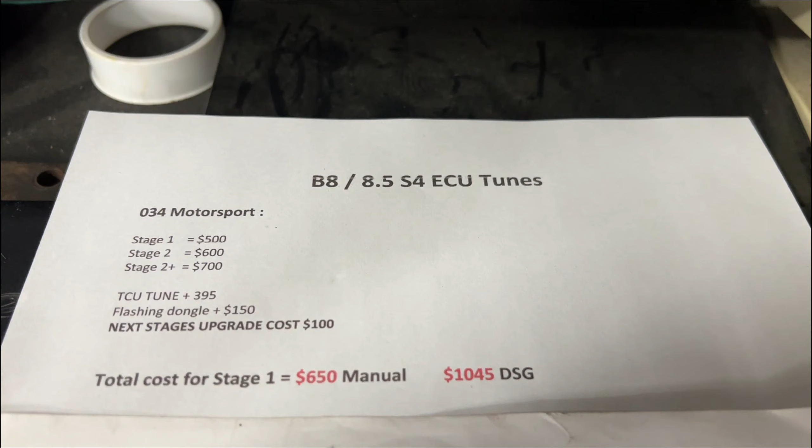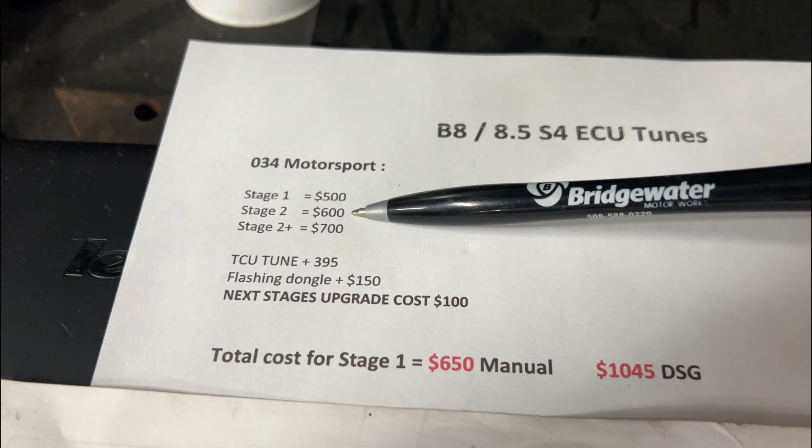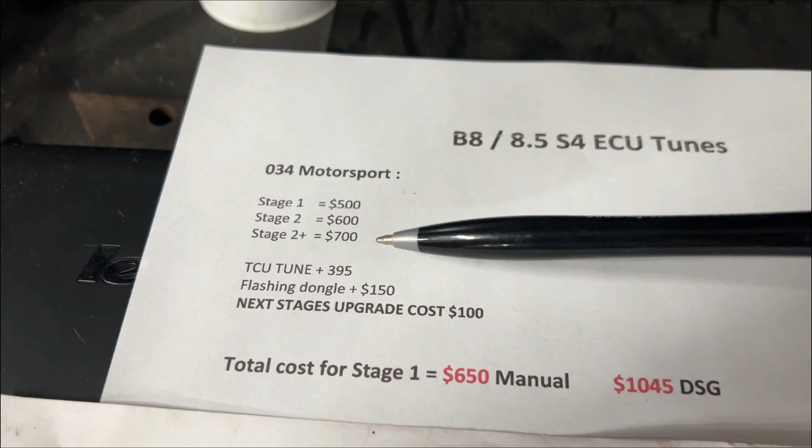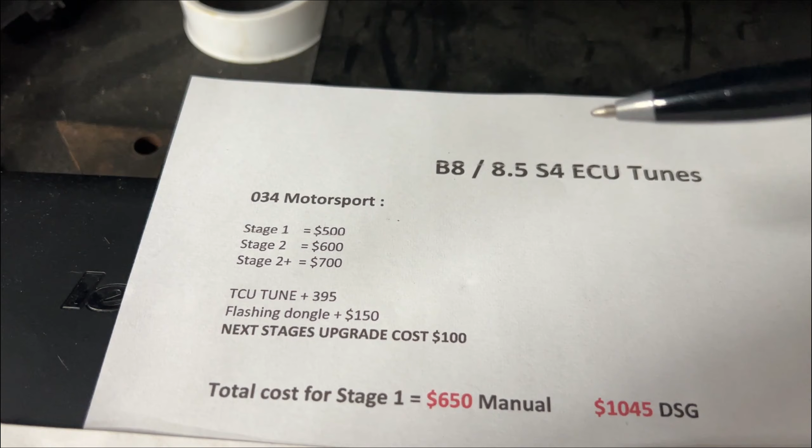The first one on the list is 034 Motorsport. If you wanted to do stage 1, it's 500. Stage 2 is 600. Stage 2 plus is 700. Keep in mind this is for a manual. If you wanted a TCU tune or a DSG tune, as they call it, you add $395 to that, and you also need to add $150 for the flashing dongle or the Bluetooth adapter for your phone. We'll talk about that a little later.

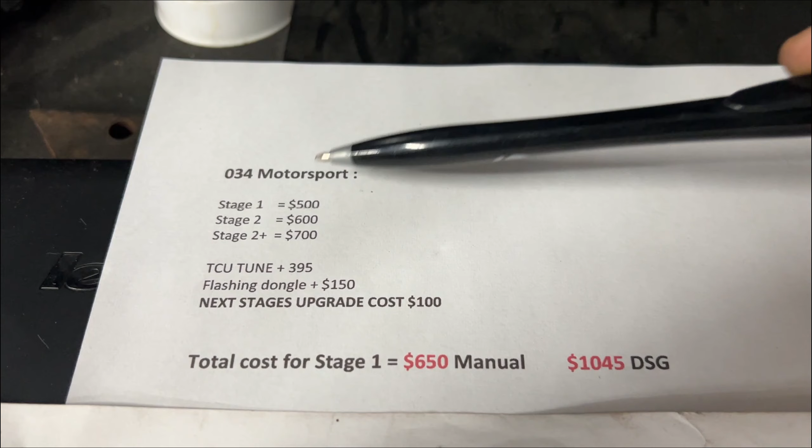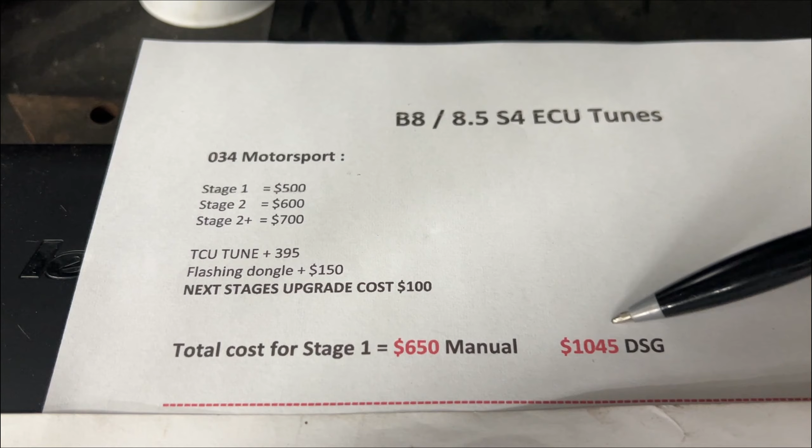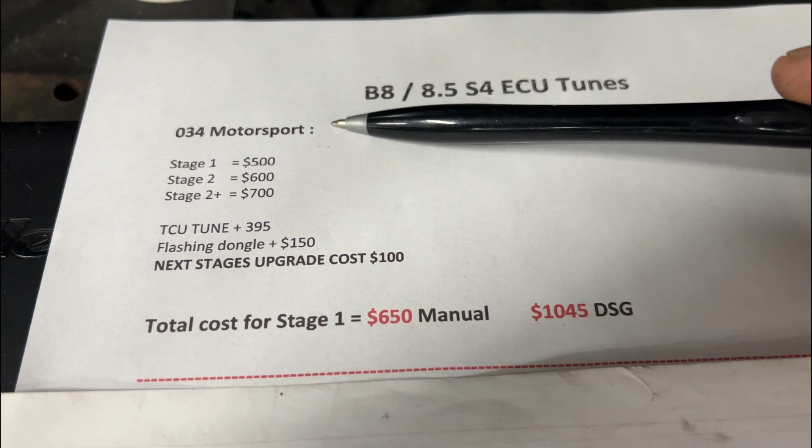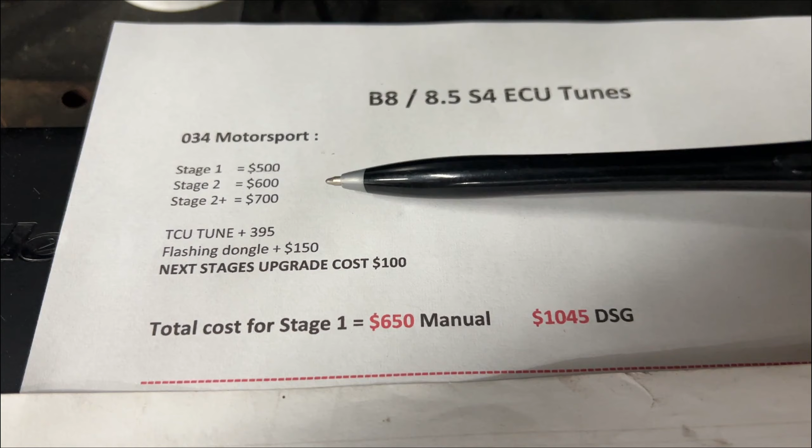Either way, if you have a manual S4 and want to tune it stage 1, all you'd pay is $650, so the 500 plus the 150. If you have a DSG, you'll pay the 500, the 395, and the 150. So that's how much it costs for a stage 1 tune with the DSG tune—not too bad. Again, they're a good company with good launch control modes and stuff, but for stage 1 there's really nothing aggressive because the car is just stock anyway. It has a cat, so you can't really do the crazy launch controls they have with a cat in place because you'll destroy your cat.

The next one on the list is GIAC. For their manual cars, all their tunes are 500, and for their DSG cars, all their tunes are 650. So why are they all the same price? Well, with GIAC, everything is a bundle. Like me, I have a manual B8.5 S4, so I bought the stage 1. I don't need a TCU tune, but I had to buy the flashing dongle, which is just an OBD2 plug with a cable that goes to your laptop.

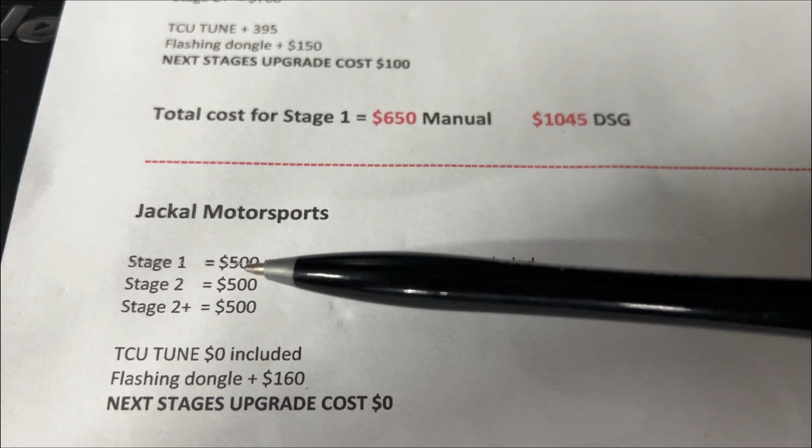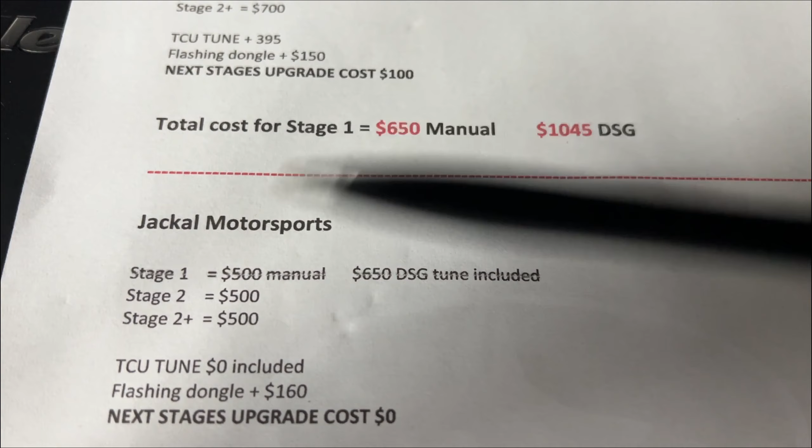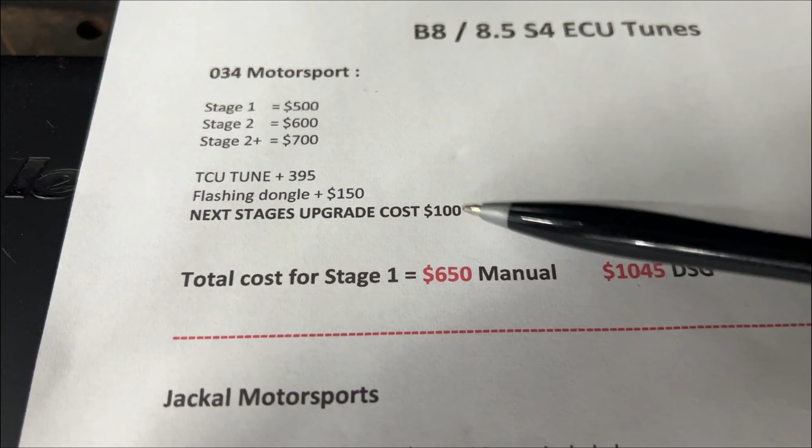The cool thing about this company is if you buy stage 1, upgrading to stage 2 or 2 plus is all included. So once I buy one, all their tunes are included in a package—I can change them back and forth anytime I want for no extra money. Whereas with 034 Motorsport, if you got stage 1 and then wanted to go to stage 2, you have to pay $100, and if you put the mods in your car to go to stage 2 plus and flash it again, that's another $100. So that would be up to $850 by the time you get to stage 2 plus.

So it's cool that the TCU tune is included if you buy the 650 package, obviously, since it's a DSG. To tune this car with stage 1, which is what I did, it'll be 660—the 500 plus the 160. Or if you have a DSG, you'll pay the 650 plus the dongle. You really can't beat this price, especially since it includes all their tunes, while all the other companies want to upcharge you to go to the next stage. But let's keep going on the list.

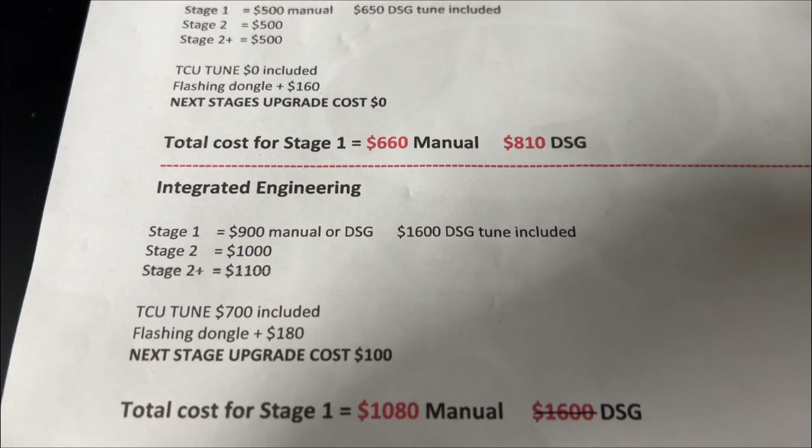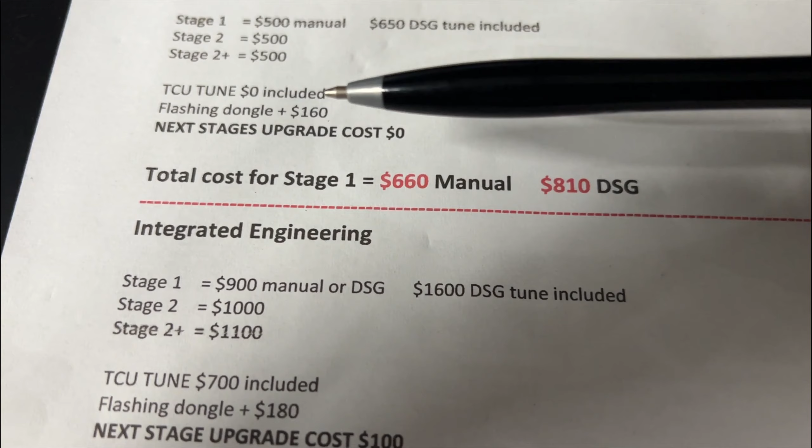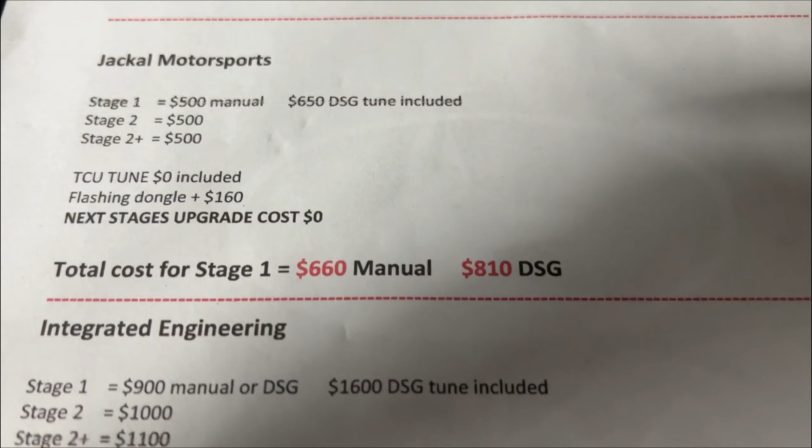So this is the last one—Integrated Engineering, a really good company. They make awesome stuff, I just think their pricing is a little off, especially having competitors. They seem to not understand they have to be more competitive if they want people to stay with them, because a lot of people are switching out. But let's go through the numbers and check it out: their stage 1 is a whopping $900.

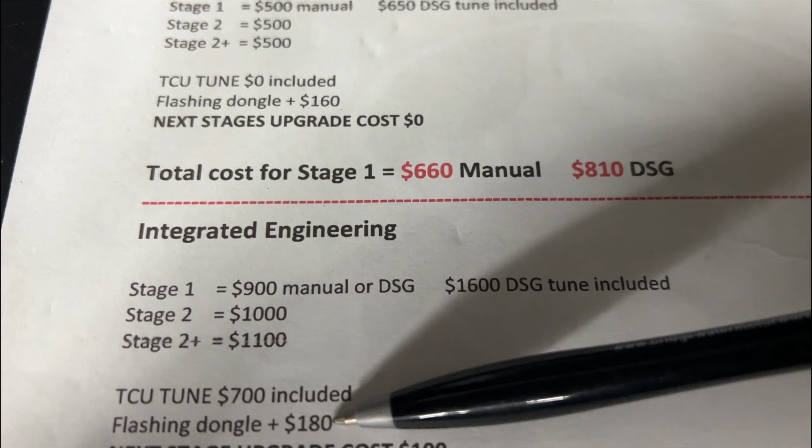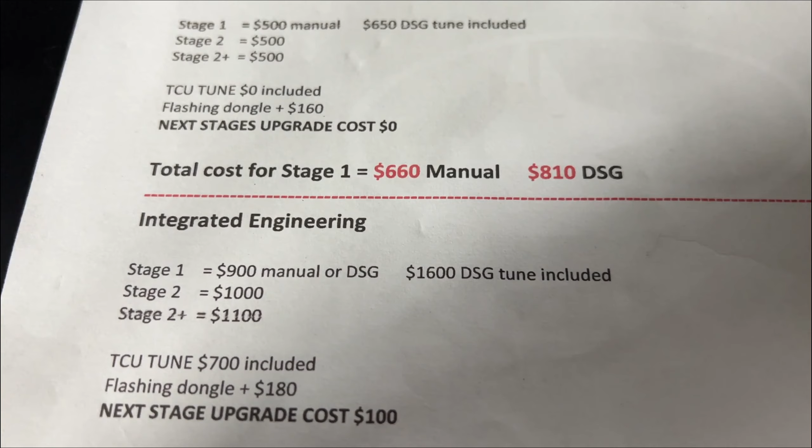Their stage 2 is $1,000. Stage 2 plus is $1,100. This is just for the tune, whether you have a manual or a DSG, that's just for the engine tuning. If you want to get the TCU tuned, that's an extra $700. And their flashing cable costs $180, which is also done on your phone. And you also have to pay $100 to upgrade to the next stages. So if you have stage 1, pay $100 to go to stage 2, pay $100 to go to stage 2 plus.

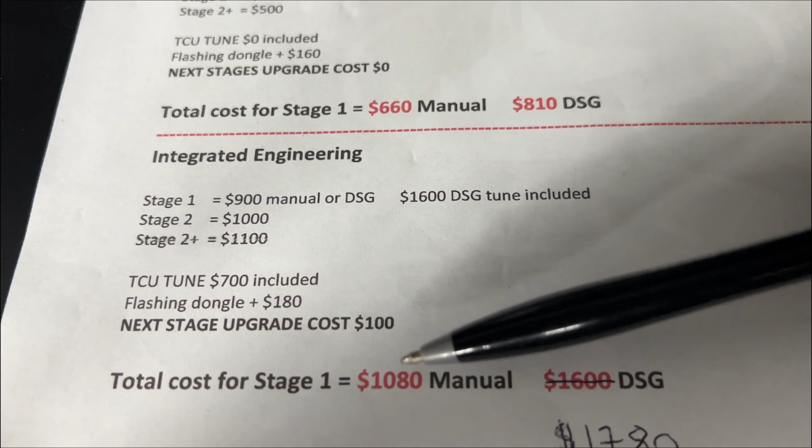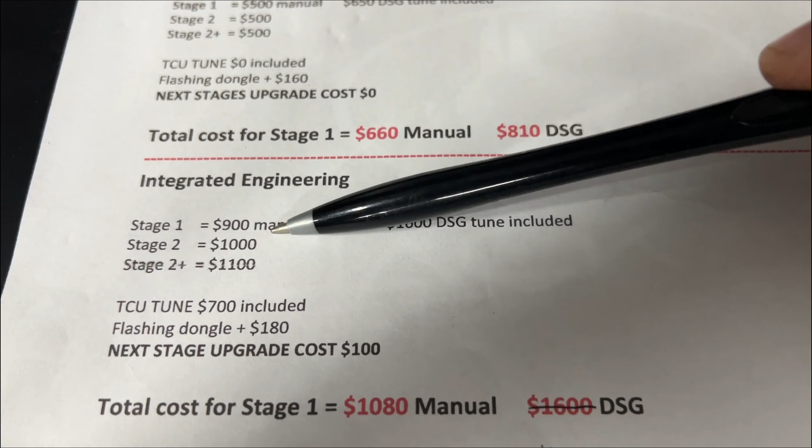So the total cost to do a stage 1 tune on an S4 would be $1080 if you have a manual. So you pay the $900 plus the $180. If you have a DSG, you got to pay the $900, the $700, and the $180, total $1780. And it's insane that they're asking $1780 to do a stage 1 tune and a TCU tune to your car when other companies are clearly way cheaper.

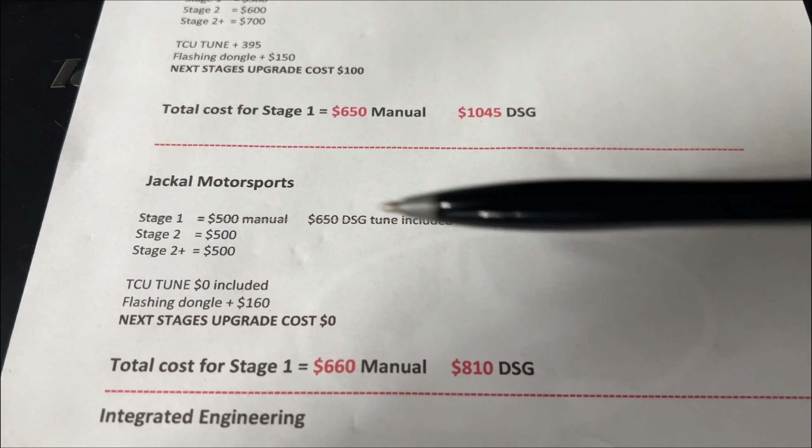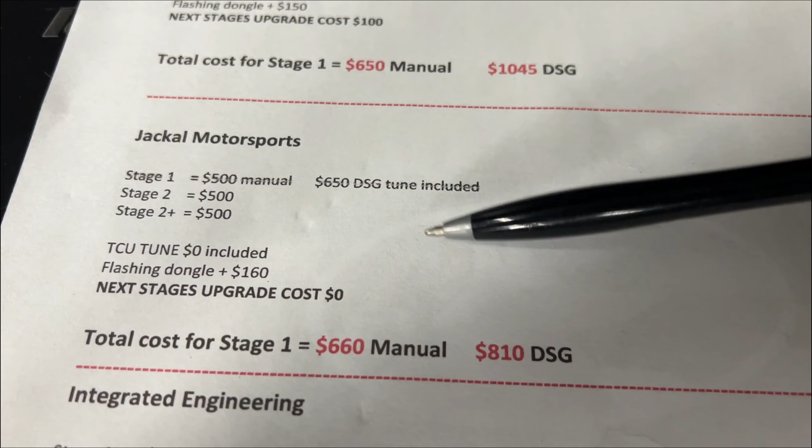And not only that, there's been a lot of claims and people that go to the track and they're racing against people with these companies, and this tune is actually beating them speed wise. So why is this tune so much cheaper and it's actually a better tune?

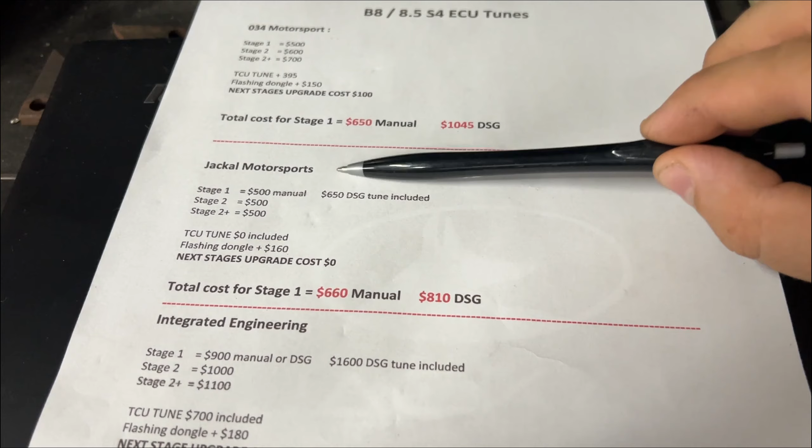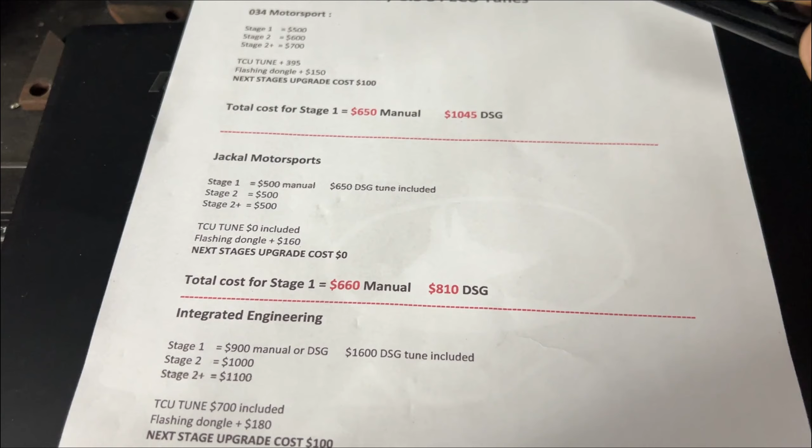Now, yeah, these two companies do have some features on the app and stuff, and that's another thing. For Jackal, you do need a laptop with internet to basically download the tune file and flash your car. With these two here, when you pay for the dongle, you get something that is Bluetooth to your phone, and you can flash it from your phone.

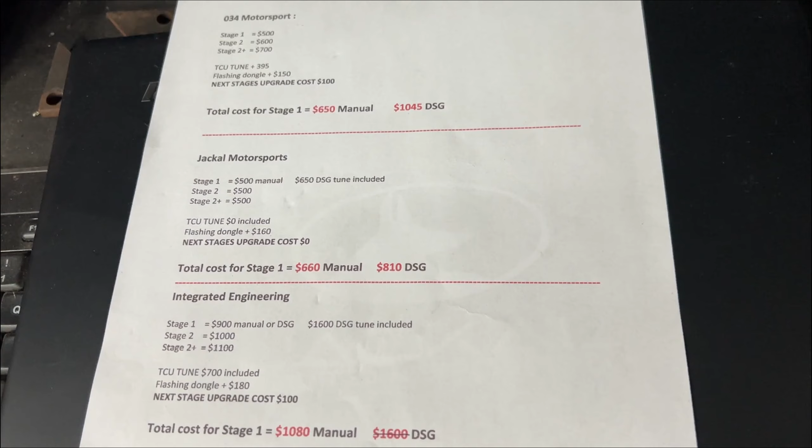But I mean, it's not like you flash every day. You're literally gonna flash once and leave it alone until you go to the next stage. So pulling out a laptop is really not a big deal. If you don't have a laptop, then yeah, that could be an excuse for you to go with another company just because you have a phone.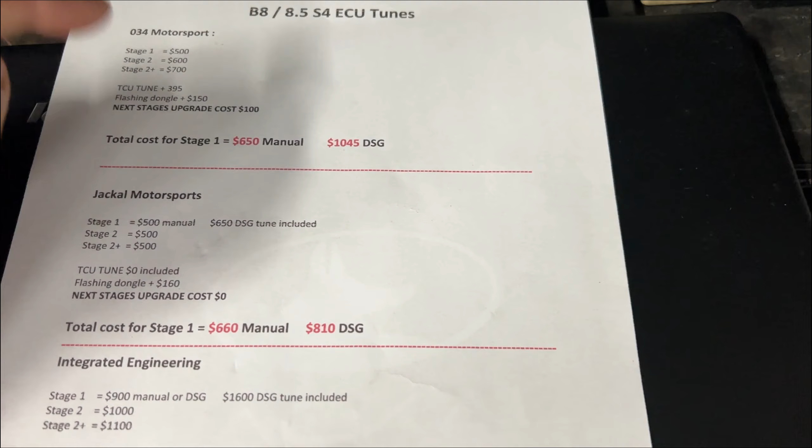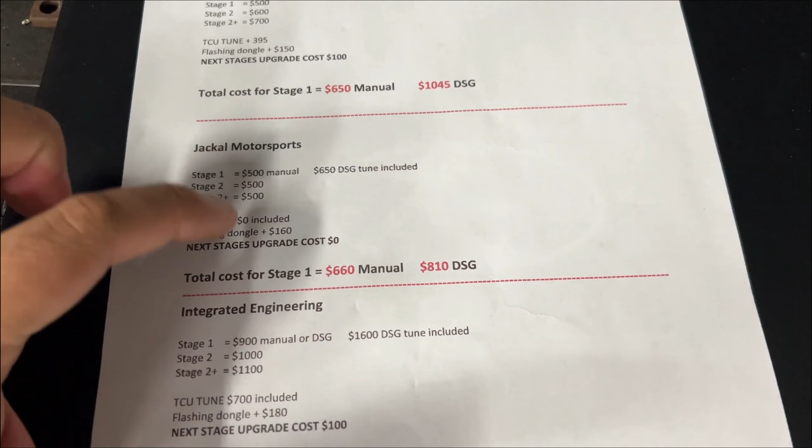Everyone has a phone. But yeah, so as you can see here, this is who I went with. I have a laptop, and this is literally a no-brainer for you to pay these two amounts here, whether you're manual or DSG, and you have every single tune that they make. That is awesome because you can literally select a drop-down box and select stage 2, stage 2 plus, stage 1. You select your octane, you select if you have upgraded throttle body. You literally, there's a list of like 20 tunes you can pick from, and that's all included in this price.

And if you get the 650, you would also have the DSG tunes too. And when they do release launch control files and stuff like that, that's usually given to you for free through Jackal. And basically, you just reflash your car with the new file, and now you have launch control or more features as they unlock new features.

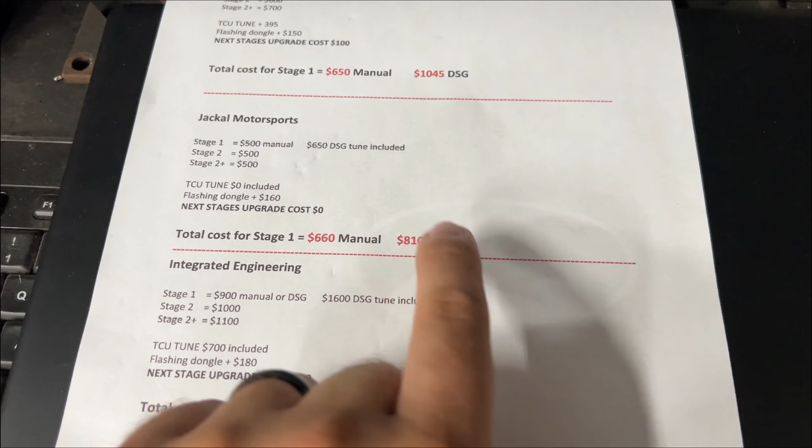So it's literally, this is on the forums. This is going wild right now because people are actually paying this much because the name has been around for a while and stuff, and they make really good stuff. But then they're going to the track, they're losing a race to someone that has a Jackal, and then they're switching. So you're basically going to pay this plus that eventually, because you're going to realize that this tune is not only cheaper, but it's actually better.

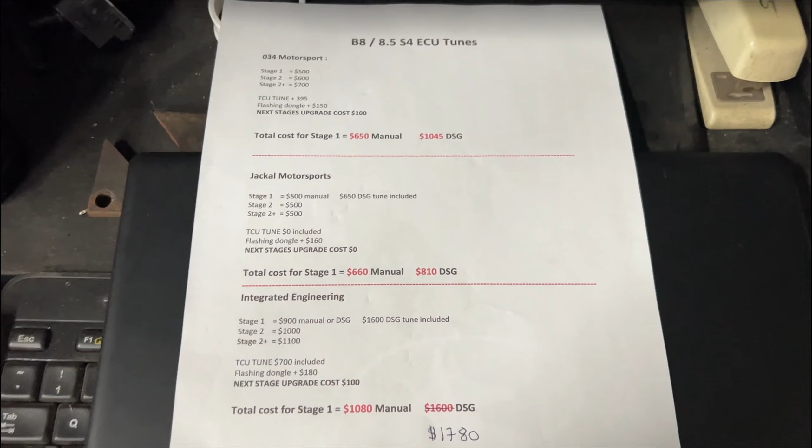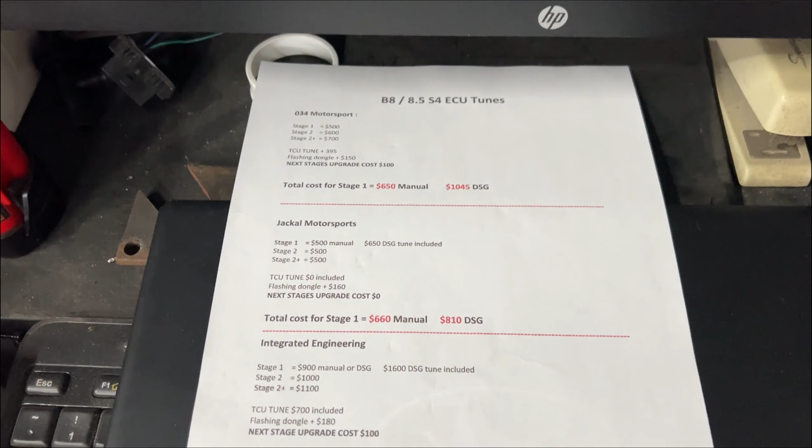Haven't heard of anything of cars blowing up or anything. Matt that runs Jackal Motorsports, wicked nice. I had a bunch of questions he answered. Sometimes a customer will ask 300,000 questions before they purchase, and I can see the owner getting a little annoyed, but literally you can send him a text message, he'll answer right away. I sent him a message on Facebook Messenger at like 10 at night, and I was expecting maybe in the next couple of days he'll answer me. This dude literally answered me at like 1 a.m, and I was like, wow, that's crazy that he answers as fast as he can. And for the size of the company, the support is freaking amazing.

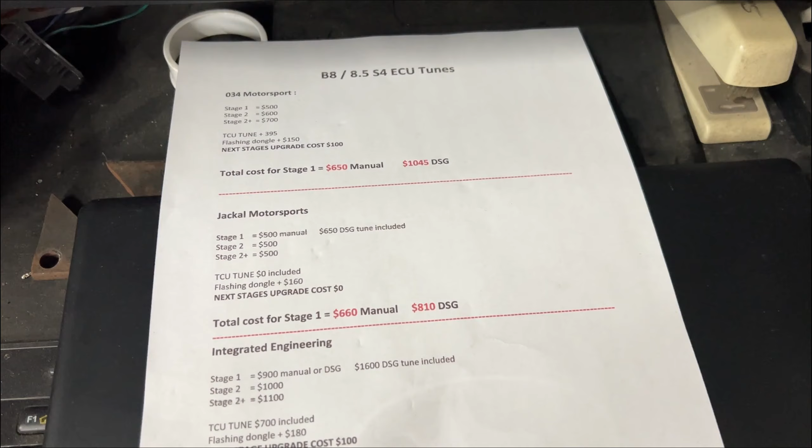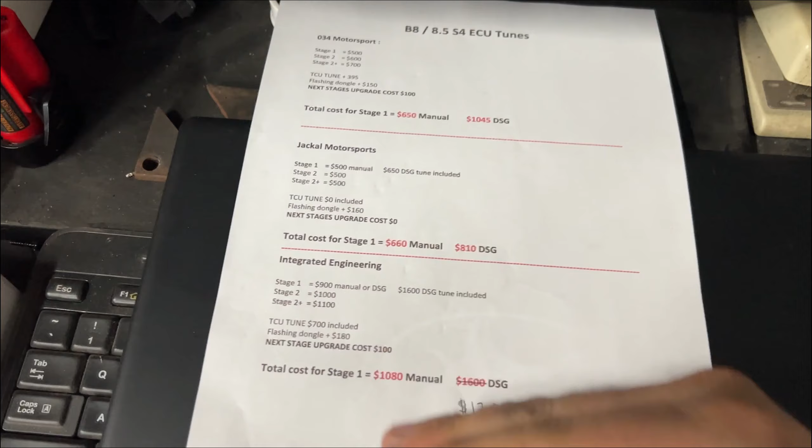So let's hook up the battery charger to the car, and then I'm going to show you guys the whole flashing process, how to download the app, how to hook it up, and everything from start to finish until retune, and then we're going to go for a ride. But I just wanted to do a breakdown so that way someone who doesn't know what these companies offer and how much they cost, it will help you pick what the best tune for your car is.

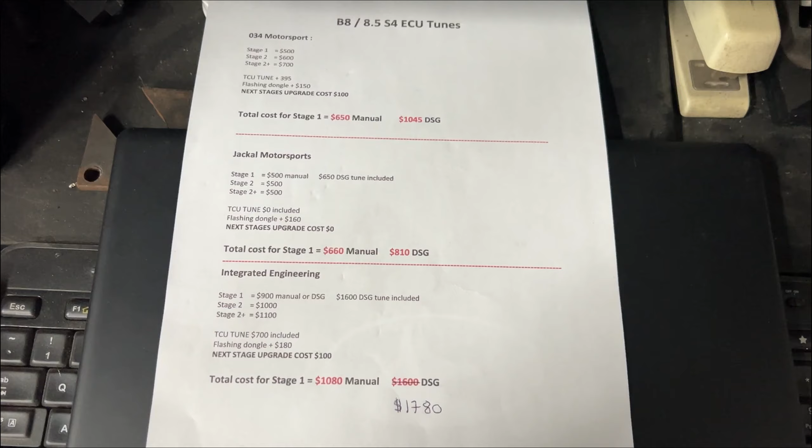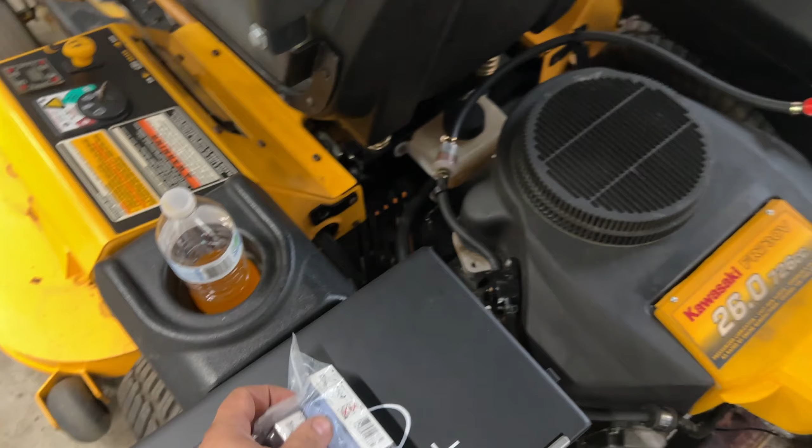They do recommend you switch your spark plugs to these here, BKR 8EIX, gapped to .026. So I did that, I just did the plugs.

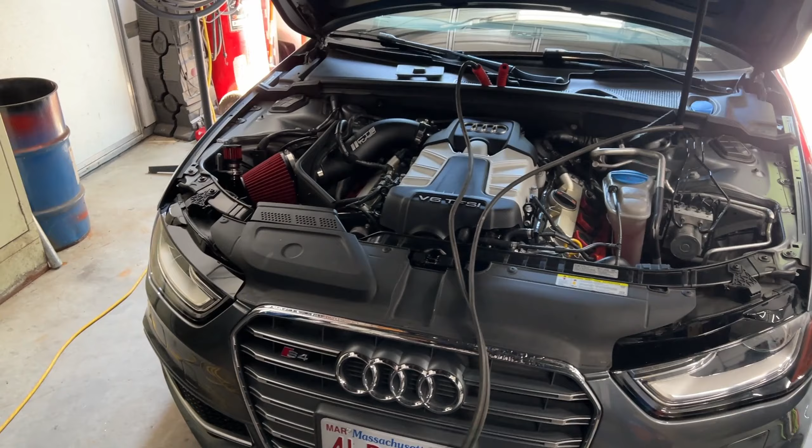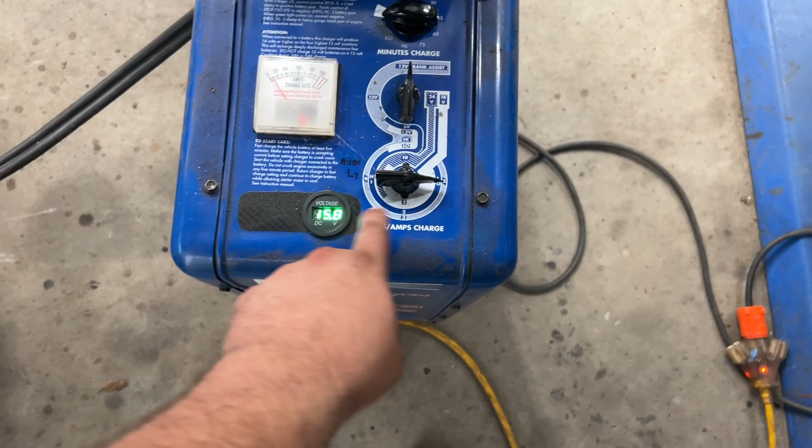Another thing you've got to do is put a battery maintainer, because during the flashing process it's just going to keep draining your battery. So here's my battery charger, it's right at 15.0. It's actually on low, this gauge isn't very accurate, but on low it usually sits about 14.5, 14.7, so that's perfect right there. There's probably very little amperage, so that will just maintain the car alive.

I already have Wi-Fi out here in the shop, so that's going to be needed to download the tuning file and upload it. Next, we're going to go into the car and I'll show you guys step by step how to open the software, how to tune it, and stuff.

Okay, so here's the process. You're going to go on their website, buy the tune, and get an email. On the bottom of that email there will be a download link, that's for you to download the software to your laptop, because you're going to need a laptop with internet. Once you do that, you're going to wait 2-3 days for the dongle to show up, which goes right into the USB on your laptop.

Once you have your dongle, you're going to email the company and ask them what's my login and password, giving them your order number. Within 20 to 30 minutes, like mine was, you should get it. They'll send you your username and password, and that's what you're going to use to log in here.

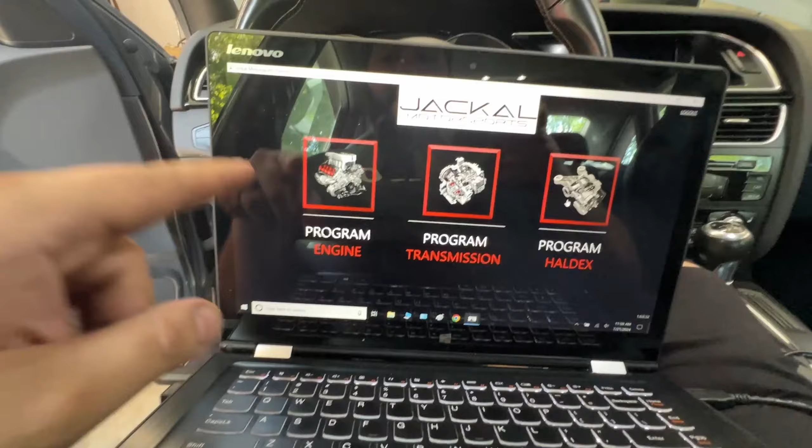So you go into your laptop, make sure it's connected to the internet, and you're going to open up your Jackal, then click sign in. You'll be on this screen here. My account was already saved, so that's why I signed in so fast. For you, go in your email, find the one with your username and password, type it in, log in. Then you'll be on this screen right here.

Then you're going to plug in your dongle. Let's see if I can do it one-handed here. They put these all the way in the back there. Okay, so that's in. Go back here. Alright, so that's plugged in.

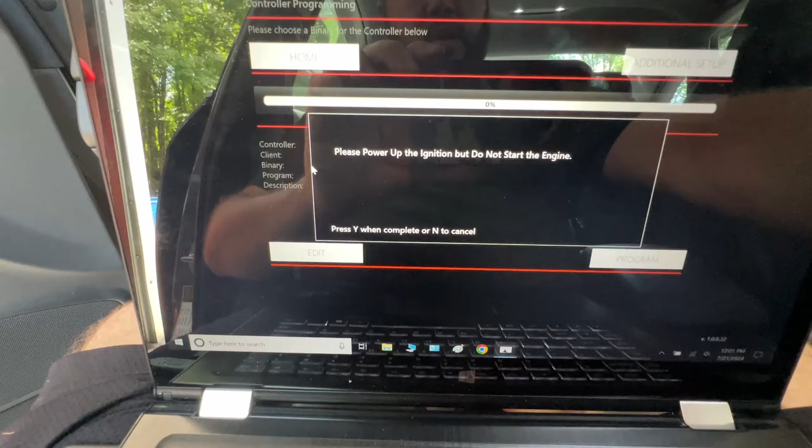Now I'm going to click Program Engine. Okay, it says power up the ignition, but do not start engine. So we're going to put your key here. Don't have your foot on the brake, mine's a stick shift. Turn the music down, and then press Y to continue.

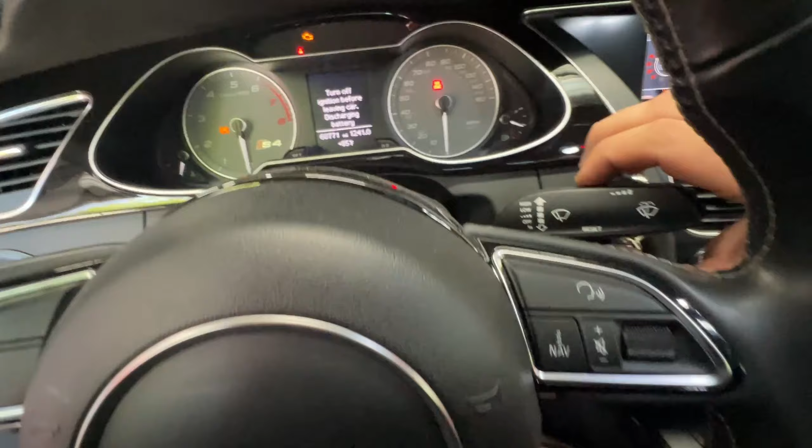Let me shut all this down. You can mute this sound by clicking under here, that reset button stops that annoying sound. Now you see, once you press Y, it's connecting to the car.

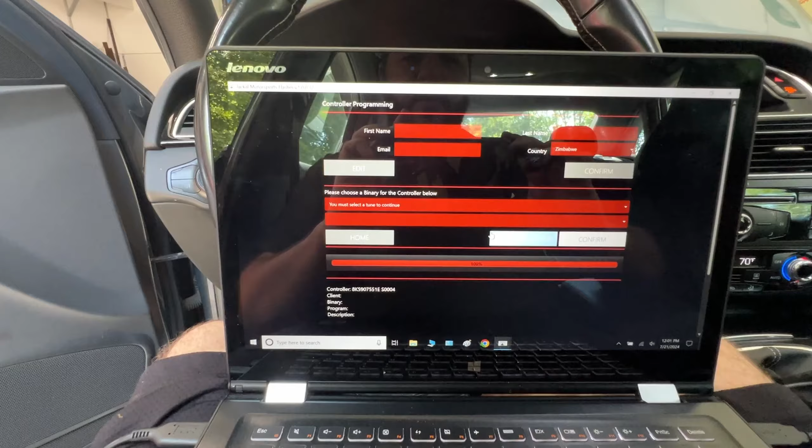Okay, now this information here is going to be my first name, my email, and stuff, so I'm going to fill this out and then press confirm. Obviously that's going to be off camera because that's personal data, so I'll be back in a couple seconds.

Okay, once you put in your information like name and where you're from, you're going to click confirm. Then you'll be on this screen, which says please choose a binary for the controller below. So you're going to come here, there's only one option, that's your production, and then you're going to select the tune.

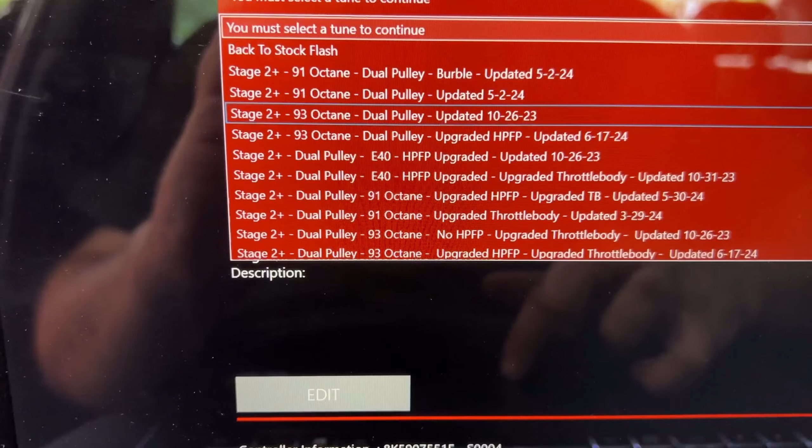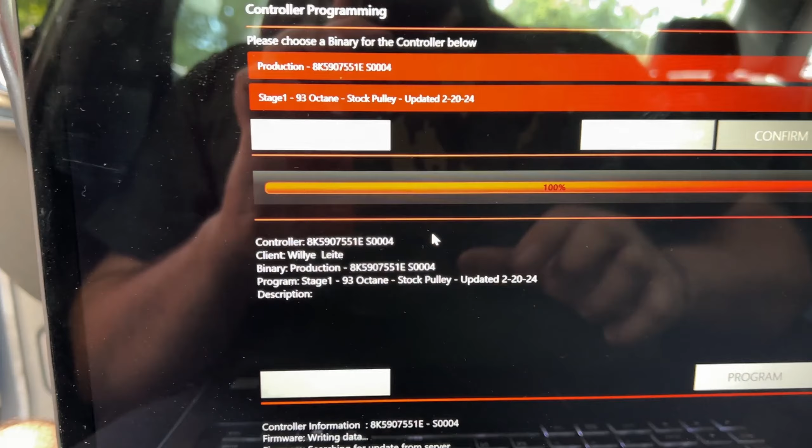Right here you have flashback to stock, stage 2 plus, there's a ton of them, and on the bottom there's stage 1, stage 2 plus, whatever. I'm going to go stage 1 for now because my car is bone stock. I'm going to do stage 1, 93 octane, stock pulley. Then you're going to press confirm.

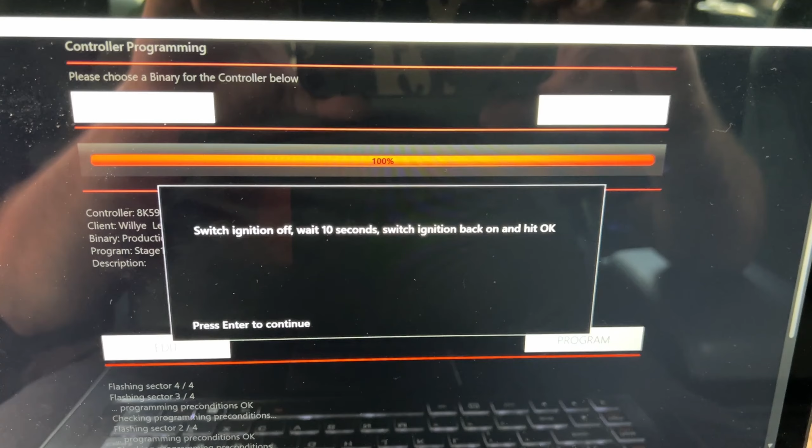Alright, we're at 99%, and now 100%. So we'll see what it says: switch off ignition, wait 10 seconds, turn it back on, and hit OK.

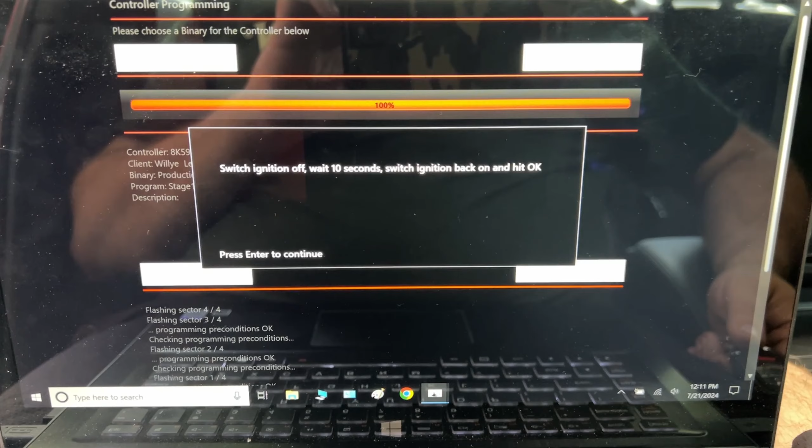Wait 10 seconds. Alright, turn it back on, don't start the car. Okay, turn the radio off, press enter.

Power off ignition. Press enter. So you really have to follow exactly how they want you to follow.

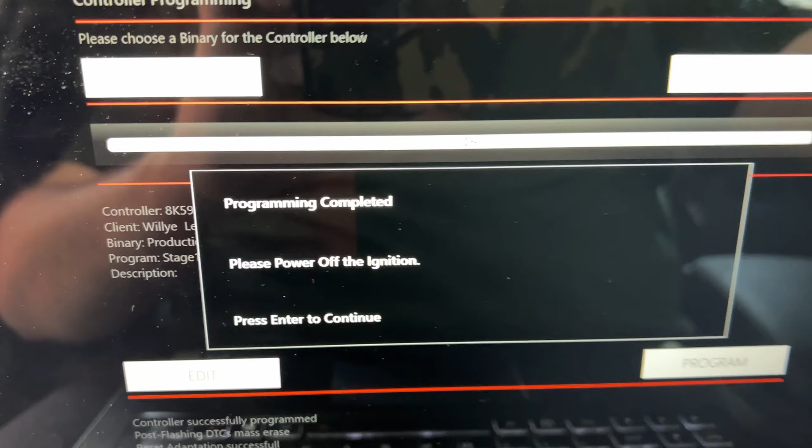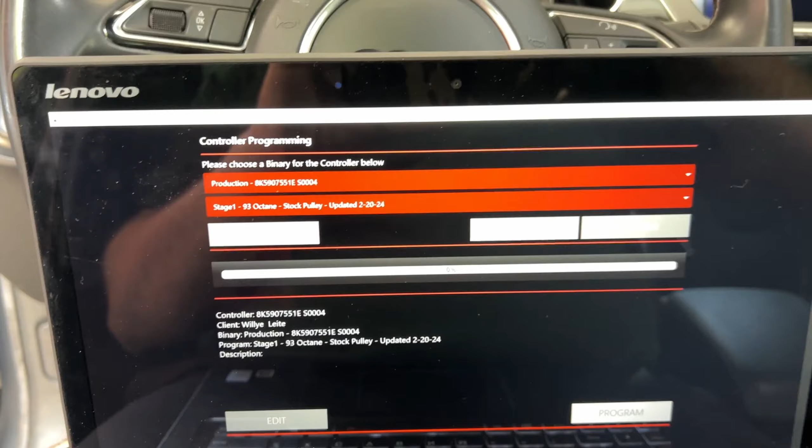Press enter. Turn that on again. Programming completed. Please power off the ignition. Press continue. Take the key out. Press enter again. And that's it, the program is completed. Now we're gonna close up everything and go for a test drive and see how she feels.

One quick thing to note is, as you guys saw during the flashing process, the dash was going crazy saying this is bad, this is bad. That's normal. When I finished the flashing, I did start the car. My TPMS light was flashing still, like the system was bad, and obviously I know it wasn't because there was no lights on the car. I did scan the car before I started it, and no modules had any codes in them.

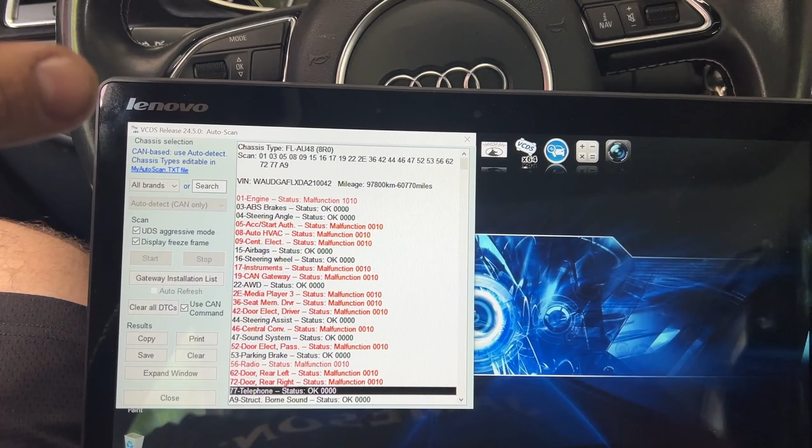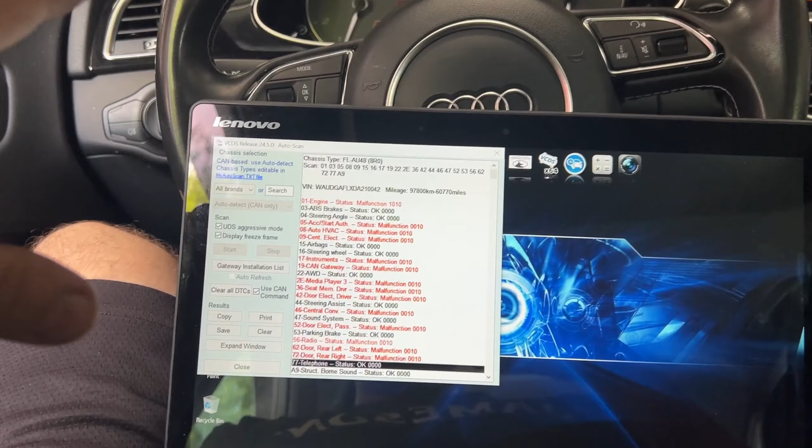So I decided to hook up VAGCOM VCDS, and these are all the codes. Apparently when the tune gets flashed, it'll set all kinds of codes for no communication and basic adaptation and stuff. So I went into the ABS module and cleared the code that was there for no communication, and the TPMS light went off. I'd suggest after you tune it, you go in with either OBDeleven or VAGCOM and just clear all the codes, so you're starting fresh with nothing sitting there.

That's what we're going to do now. I did a quick scan here, and I'm just going to clear all DTCs, and then we're going to go for a ride.

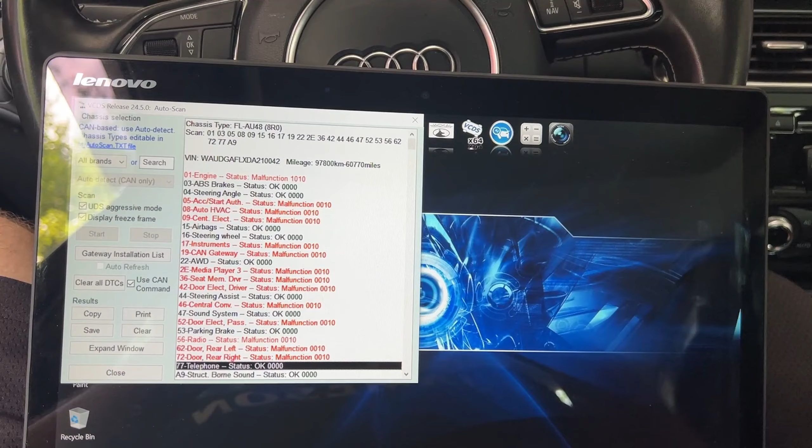All right, so this is the first test drive after being tuned. I'm warming up the car right now, so I'm not going to beat on it until it's a little warmer. I'm just going to drive it for a couple minutes, see how it feels. But the car just feels a lot smoother for some reason. I don't know if that has to do with the tune or not, but it just feels a lot smoother. So we'll do a pull in a second here.

Supercharger does sound louder. I just did a quick little pull, and there's a lot more power.

I'm gonna take a right here, and then I'm gonna do a quick little second gear pull to see how it feels.